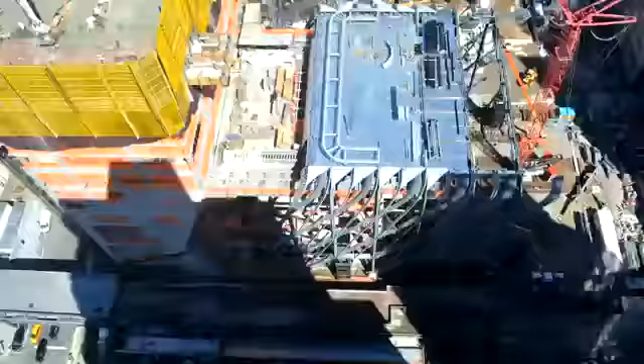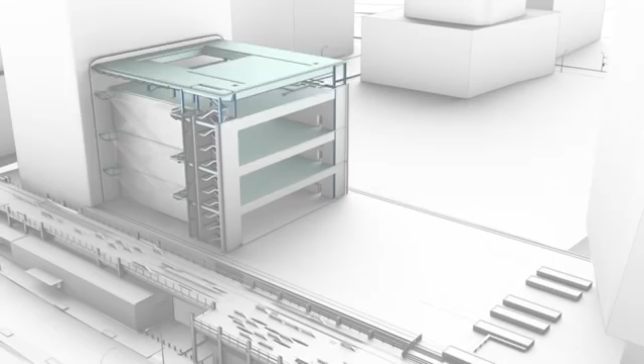It's basically a crane. It's a fixed building with multiple levels of column-free floor plates and a shell that's able to nest and deploy on the fixed building. And when nested, opening up a big open space. When deployed, could be indoor, outdoor, have a flexible space where the elements could come in, or have a totally sealed, thermally controlled footprint that's also light and sound controlled.

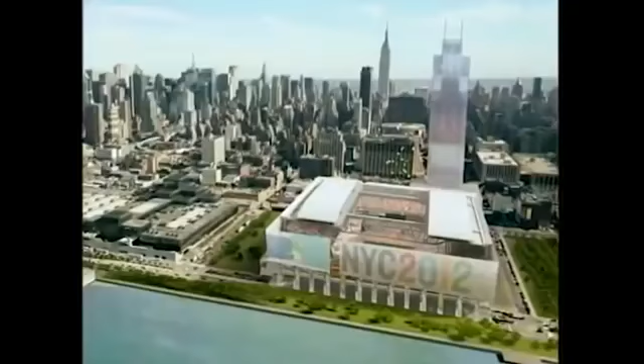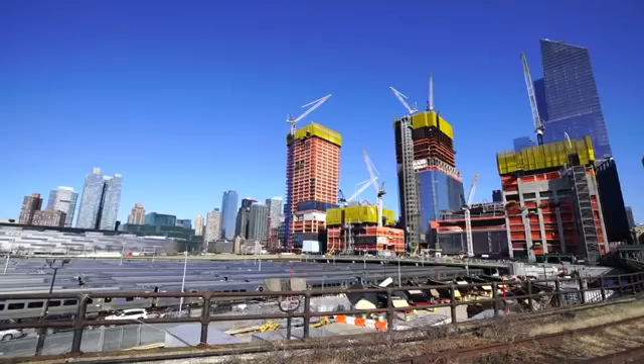That area had been designated as a potential site for the Olympics bid that New York did not get in the end. It went to London. But in a true American spirit, I guess, rather than see that as a defeat, they saw that as an opportunity. And the then Mayor Bloomberg, when asked if this could be repurposed, he said on one condition, that there would be a piece of city land at the heart of it onto which a cultural institution would be built.

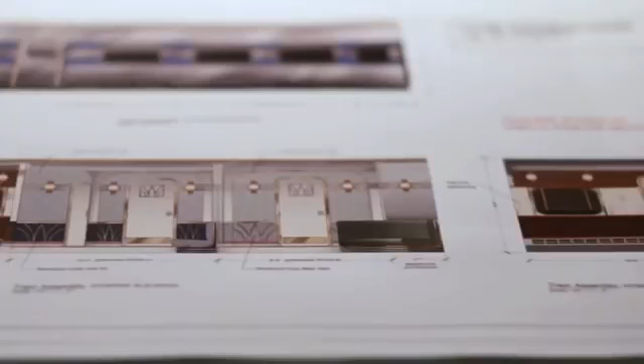So the city put out an RFP for anyone that had an idea about what to do with this plot of land. And we responded to this RFP, myself and David Rockwell. So Liz is really, really experienced in the visual arts practice. David is a Tony Award-winning theatre designer. Because we had those two architects who had always cared about the arts from the start, we were able to slide in to what they were doing and I think relatively effortlessly align the vision, which was about commissioning artists across all art forms, and make this a home for them.

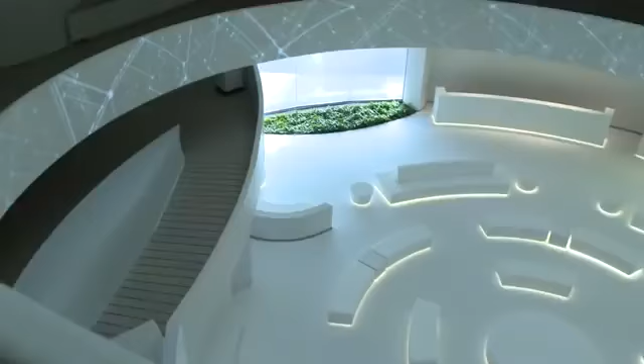We talked to artists and leaders of cultural institutions in New York and around the world about what are the trends that might be affecting cultural institutions. And the one thing that everybody kept coming back to is that the internet and the capacity it gives for people to collaborate across disciplines is fundamentally beginning to alter the cultural ecosystem. And that what we're beginning to see is artists working across discipline, producing work that didn't fit neatly into traditional institutions.

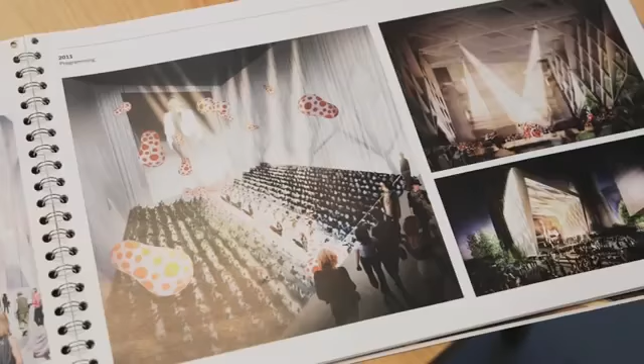New York doesn't have a place where all the arts can come together under one roof. And I'm not just talking about separately under one roof, because we have multiple disciplines at MoMA, for example, under one roof. But I'm talking about collaboratively working together with crossover work. There's nothing that says that artists need to be constricted into gallery spaces. They could use the whole building. The building is a tool.

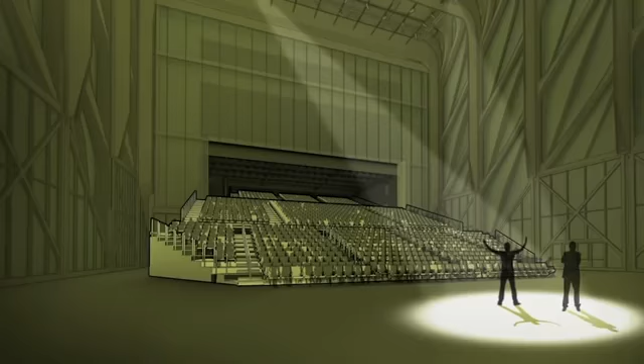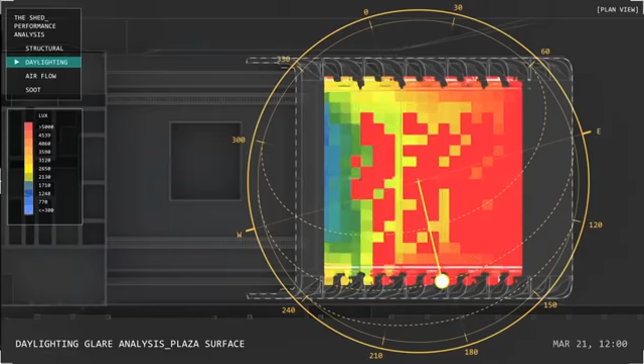The expandability allows the shed to be able to mount extra large installations, theatrical events, performances of all kinds. But if that space isn't needed, you could just simply park it on the fixed building and open up an outdoor space for the public. In this way, it's actually very economical and very conscious about its own energy and not being wasteful. And by the way, the opening of the shed is the horsepower of one Prius engine.

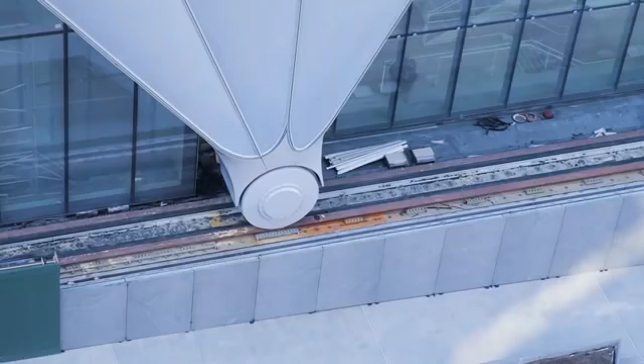So the shed has three kinetic components that make it move. It has rails at the base, wheel assemblies that allow it to roll, and a drive system at the fixed building roof. Starting with the rails, there's 273 feet of continuous rail along here. They were brought to the site in 72-foot pieces and thermite welded on site.

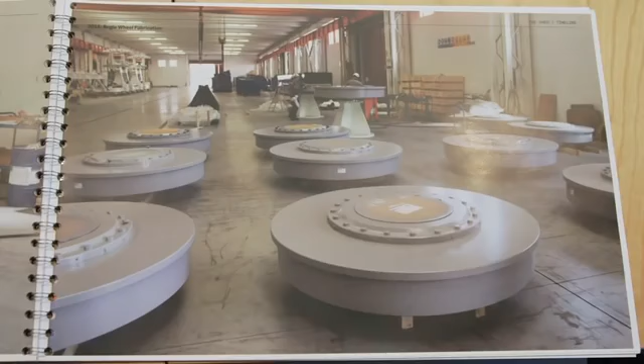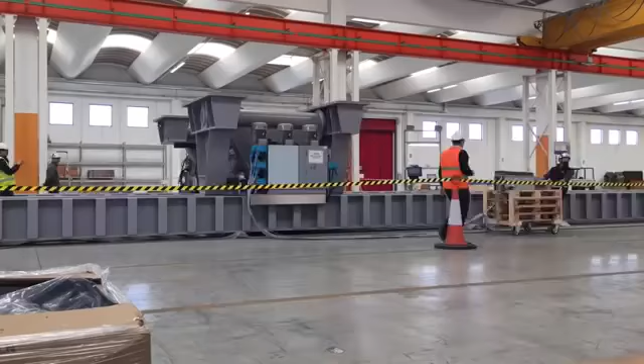The wheels, on each side there are two sets of single bogies. On the eastern end of the building, there's a double bogie. It has an axle, like you'd find in a car or a truck, and then the wheels on either side of it sort of spin loose around a set of bearings that are mounted onto the axle. It's the levelness of the rails and the freedom that those bearings offer for movement that allow the kinetic system on the top of the building to drive the 8 million pound shed with just 180 horsepower.

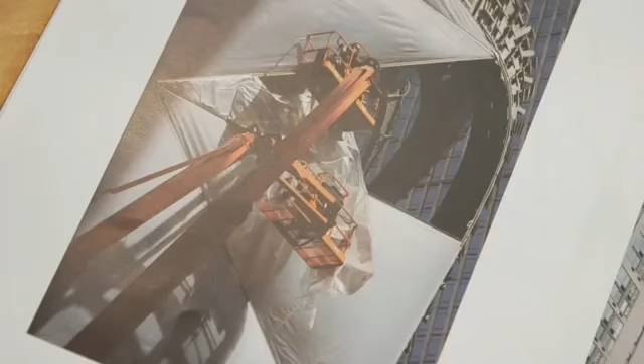One of the unique aspects about the shed's diagrid is the facade system. The facade is made of ETFE, it's ethylene tetrafluoroethylene. It's a Teflon-based polymer that is fabricated similar to a sail, where they have sail makers cut the patterns, weld seams, and they bring them to the site rolled up. They attach them to the steel frame, and then they inflate the various layers.

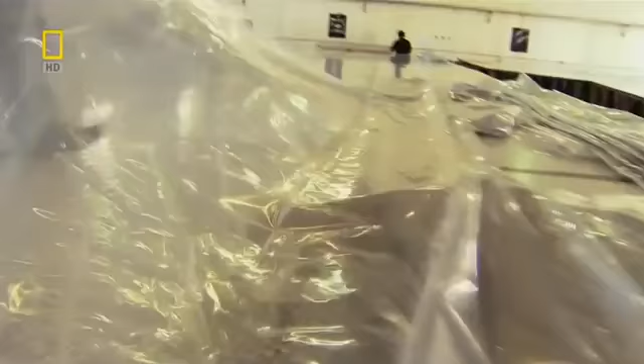It can span as long as you can fabricate it, and it can resist tremendous wind loads. It's very resilient, where something rigid like glass or fixed panels wouldn't be. So whatever torsion the shed finds when it stops and starts is easily absorbed by this pneumatic cushion. If you compared it to glass, not only is the material itself 1/100th the weight of glass, but it doesn't require any of the backup structure that you would typically see. I would say we probably saved 30% of the weight of the shed through the use of the ETFE.

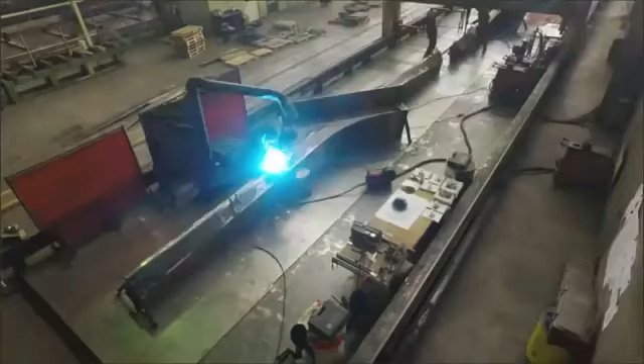This geometry is very straightforward when you think about the load imposed on it, right? The gravity loads, there are vertical columns that all go back to the wheel assemblies. So the vertical structure's handling that. Wind loads coming from, we'll call it the east or west, these diagonals are taking those loads and making the frame rigid.

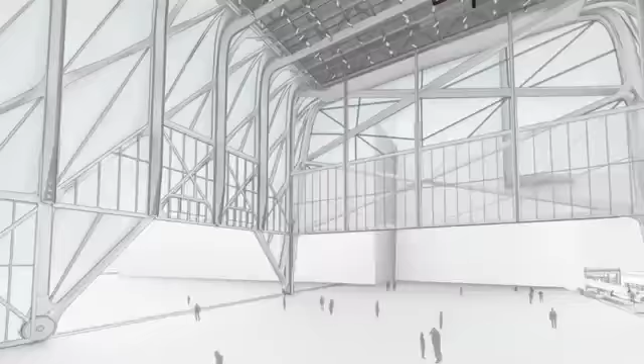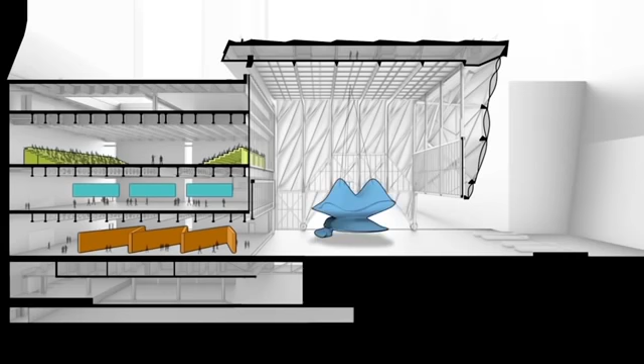Another really very important feature is that because the shed is actually a gantry crane, you have to be able to haul things up and down and across and so forth. So we have this idea of being able to load very large sculptures or building materials actually through the facade and be able to use the shed as a crane to move materials up and down. So we were thinking about this whole thing being an instrument for producing art, for making things, for installing things. This was a kind of labor of love to massage this design to be clearer and more efficient, but at the same time very elegant and expressive.

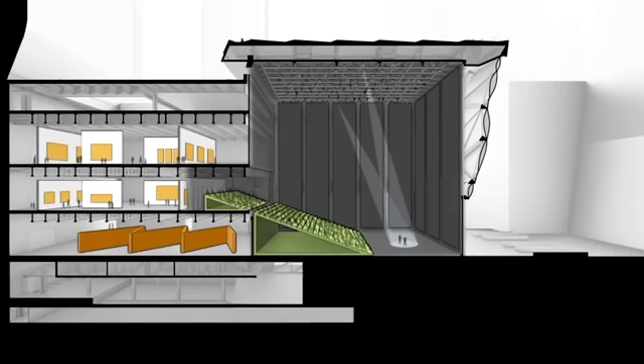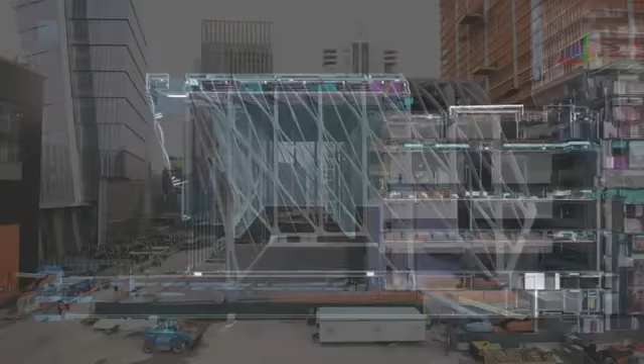One of the key things I've certainly learned through my experience with the shed is we're never smart enough to predict the future. We give it our best shot, but with technology at least, when we have open platforms, we can change as technologies or tastes or trends do. I think that's the way we're going to be designing neighborhoods in the future. I think that's also the way we've tried to design the shed, as sort of open architecture-like as possible so that it can adapt as times change.

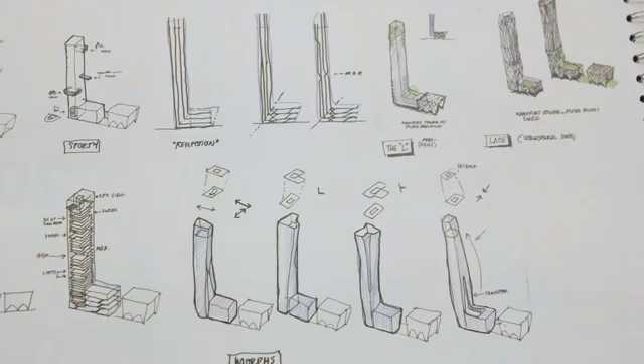One of the big problems with architecture is that it's fixed and it's permanent from the moment of its construction. This building is responsive. It's kind of paying attention to things and trying to accommodate and prompt as well. It would be interesting to have a conversation between the building and artist. And that's the thing that I look forward to most, is the things that I can't possibly dream up. And I would really love to be surprised by things that I couldn't imagine right now. I think the building will be successful only if it produces things that we can't anticipate.